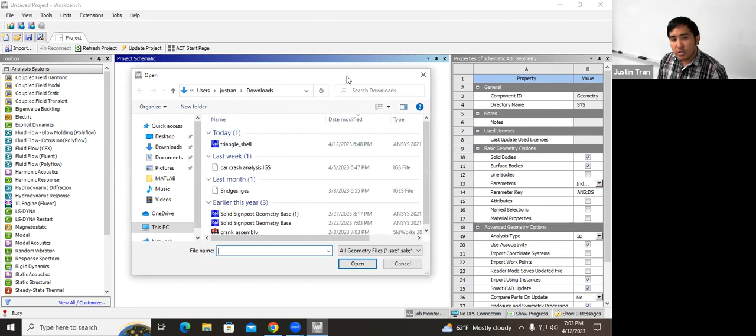And just for cost's sake, the original geometry for this activity was a normal solid type geometry. But it is very thin, so I went ahead and converted it to a shell for you just to make the simulation a little bit faster.

After you've imported the geometry, let's go ahead and open it up within Design Modeler. Right click on this geometry here, and open it up in Design Modeler. It should be the default because this part was made in Design Modeler. But in case it's not the default, make sure you click this one and not SpaceClaim and not the other one, I forget the other one already. But we're going to open it up in Design Modeler.

Okay. And so the reason we're opening this up in DesignModeler first, we're not making any changes to the geometry, so we're just leaving it as it is. But we're letting ANSYS know that ANSYS is going to have the ability to change this geometry, based on whichever parameters that we set.

Because if you remember from our discussion on Monday, whenever you're running an optimization, you have to specify what your design variables are. So you have to specify which variables you're going to allow ANSYS to change throughout the optimization process. And so for this geometry here, the variables that we're going to allow ANSYS to change are going to be the dimensions of this plate itself.

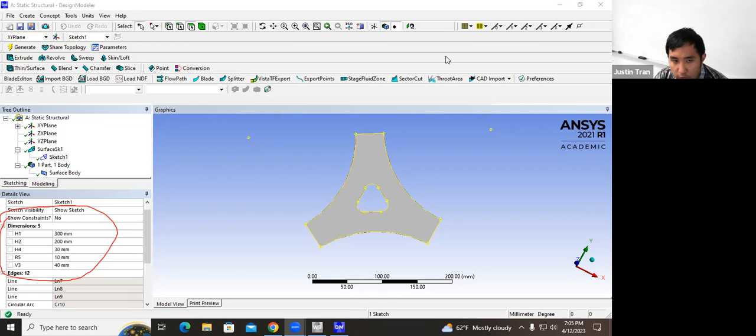And so in DesignModeler, you're going to go click on this sketch right here. You're going to expand surface sketch 1 and then click on sketch. And if you go to the bottom left of the screen, and let me make mine a little bit bigger just so you can see. If you go to the bottom left-hand side of the screen, you'll see that there are various dimensions that are being defined here. And so these dimensions here basically define the geometry of our plate.

And I'm trying to see, is there a way to kind of see where these are? And so if you click on the dimensions, you can kind of see what they are. So a lot of them define how big the part is, how big the radius of curvature is, the distance between those plates, and kind of the width of the plates as well.

And so what we need to do at this point is we need to specify which dimensions we are going to allow to change. And so later on in the activity, I'm going to have you experiment and try out different dimensions. But just so that we're all on the same page for this part, we're going to specify H4 as a parameter, as well as R5. So these two parameters right here.

And so to specify something as a design variable, if you look at each of these dimensions, there is what looks like a checkbox next to it, right? So you're going to click on that checkbox. And by doing so, you're going to put this P next to that parameter, right? So we have this P H4. And what that P basically tells you is that that is now a design variable.

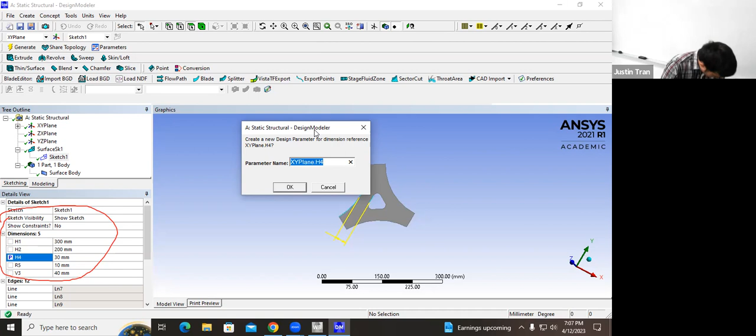And what you'll notice too is that after you click on that P, this new window here is going to pop up, asking you to define a name for that parameter. And so you can stick with the default name. That's okay. But usually when the program gives you the opportunity to name something, it's good to name it something that's going to be useful for you to remember later.

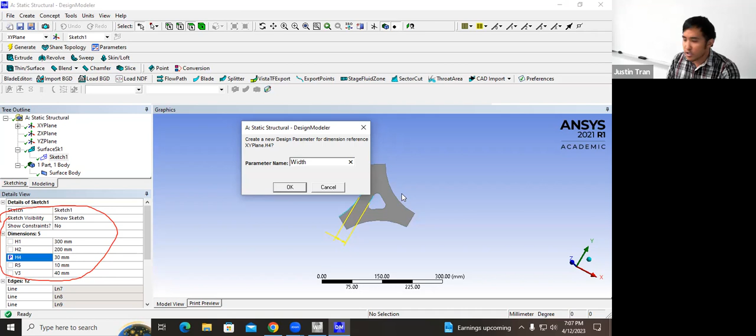And so in particular, this H4 parameter here defines how much distance there is between the edge of the plate and this inner triangle here. So I'm going to give this the name width, just so that we know later on what this parameter is referring to. And so you can go ahead and click OK.

And the other parameter that we're going to set here is this R5. So we're going to click on the checkbox next to R5, and then we're going to call this one the fillet radius, because if you look at the figure here, this R5 defines the radius of curvature for this fillet right here. And so after you've named those two parameters and set them as design variables, we're going to click OK. And then from here, we're going to move on.

Okay, and so of course, another thing that you can do is you can specify more design variables here, and that's certainly possible. But remember, if you remember from Monday, the cost of an optimization, or how many simulations that you need to run, scales very hard with the number of parameters that you put. Going from 2 to 3 is actually a very big increase in cost, and then going from 3 to 4 parameters is an even bigger increase in cost as well.

So you want to be careful with how many design variables that you put, unless you have a lot of time on your hands, or unless you have a very powerful computer. And so just so that we can finish the activity within the confines of a single lecture, we're going to stick with 2 for now. But then on your own later on, I'm going to have you try with 3 and see how many simulations that takes.

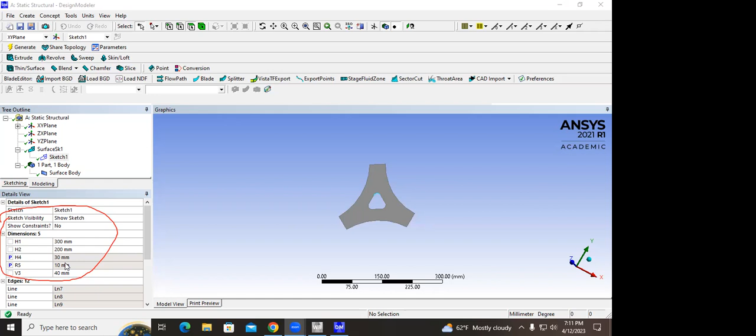So you'll see constraints later. What you'll see later on is that ANSYS is going to say, I see that you've defined these 2 parameters, and it's going to ask you, what are the constraints for these parameters? For instance, we're going to say that H4 can only be between 25 and 35. So that 25 and 35, those are the constraints for parameter H4. I see. Sounds good, sir. Yep. All right, any other questions on this part here?

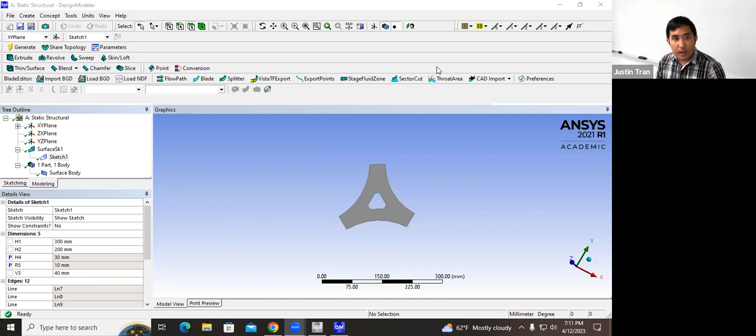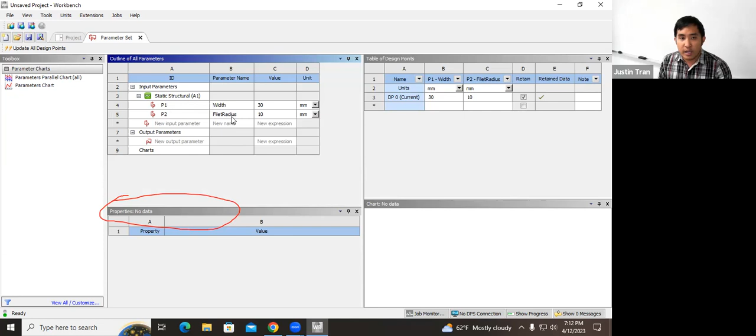Okay, so now that we've set these as parameters, we are good to go. So we can go ahead and close Design Modeler. After this, the only thing that you should have open is ANSYS Workbench. One thing that you should notice right away is that we have a new box here called parameter set. This box is keeping track of all the parameters that we've set so far. We've set 2 parameters, basically two design variables, which is the width and the fillet radius. This is where the names come up.

All right. And so the next step is to define which parts are going to make up our outputs or make up our objective function. To do that, we're going to double click on model, and we're going to open up ANSYS Mechanical. We also need to make a mesh, and we also need to define our boundary conditions as well. So we'll do that all while we're in here.

All right, so here is our plate, and it's flat, like a piece of paper. First thing I want to do here is define a mesh. We don't really need any special settings for this case, so we're just gonna set a size here. Just to be consistent with the problem document, I'm going to set a mesh size of 5 millimeters. Let's go ahead and mesh that.

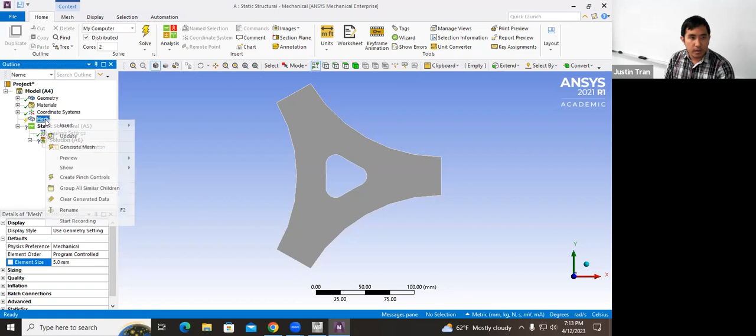And so you should see that this mesh should produce pretty well. And so this is a pretty nice mesh. Okay. And we're going to add a couple boundary conditions as well. Okay. And so first we need to add a fixed constraint, or fixed support, I should say. I should be careful with my terminology today.

Okay, so let's go ahead and add a fixed support. And we're going to apply a fixed support on this edge right here. If you're looking at the geometry, then we're going to apply the fixed support on this kind of curved edge on the left right here. The part is perfectly symmetric, so you don't really have to worry about which edge it is.

But if you want to do the same thing as me, I basically click on the Z-axis here, and so the x-axis is pointing to the right, the y-axis is pointing up, and I'm constraining the left edge of the part. Okay. Next, we're going to need to apply a force. So we're going to apply a load. And so I'm going to input a force load.

And I'm going to apply it on this edge of the part. If you're looking at it from the same direction, it's going to be the edge on the right. The only thing that you have to make sure of is that the edge should be on the opposite side of wherever you applied the fixed support. Okay, so let's go ahead and apply that edge right there. I'm going to define this.

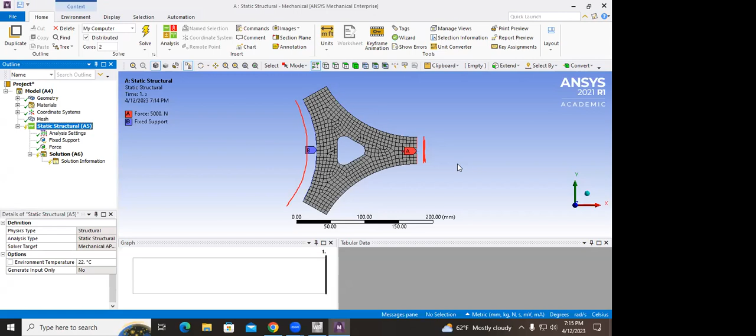Professor, quick question. Was the mesh size 5 millimeters or 5 meters? 5 millimeters. Thank you. Yeah, so a mesh of 5 millimeters, one fixed support, and one compressive force. All right, anyone have questions on this? Okay. All right, so let's go ahead and run the simulation.

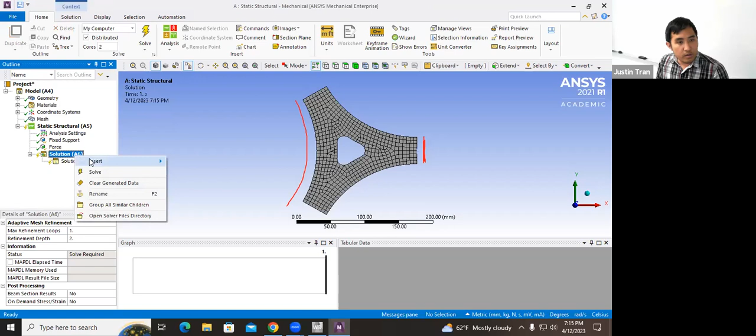And so we're going to add a total deformation field as well as an equivalent stress field. Okay. So let's go ahead and solve. Should finish up very quickly. Okay. Go ahead and erase these lines. And so you should get an equivalent stress field that looks like this, and a total deformation field that looks like that.

All right, was everyone able to get this deformation field? So you should get a max deformation of about 0.036 millimeters. And then your maximum equivalent stress should be about 95.2 megapascal. Okay. Anyone have questions on this part? Question in the chat. Okay, good. All right.

So now that we've run the simulation, we need to specify which variables are going to be the outputs of our optimization. Remember, the way that the optimization works is that ANSYS is going to tinker with the design variables. We've already set the design variables, and then it's going to run simulations and check the results in terms of whichever we define as the outputs. We basically have to tell ANSYS, what should it be looking for? What should it be optimizing over?

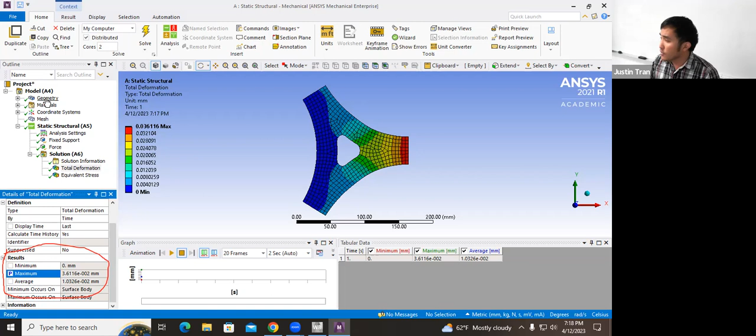And then the next thing we're going to set here is that we also want to save on cost. The way that we're going to save on cost is we're going to optimize over the mass of the geometry. We want to reduce the amount of mass as much as possible. This is a very common thing in optimization, because a lot of times you want to save material costs, you want to save manufacturing costs.

Okay. And so you're going to click on geometry over here. So click on geometry. And of course that's going to change the details window in the bottom left. Okay. You're going to click on properties.

And then the other thing that we're going to set as a parameter here is the mass. So make sure you click on that as well. So we've set two outputs here. We've set the maximum deformation as an output, and we've also set the part's mass as an output as well. Any questions on this?

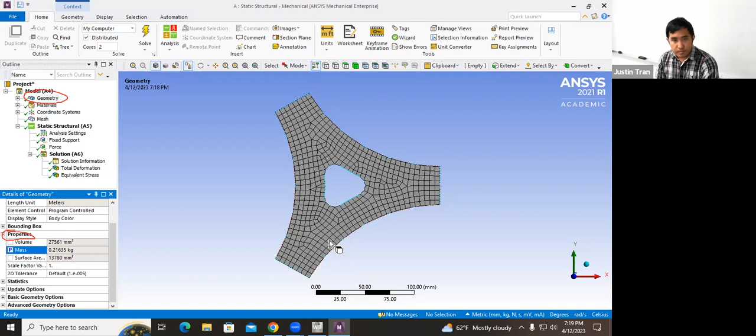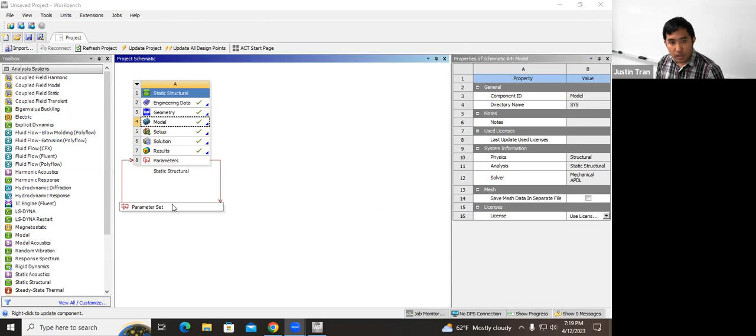Okay, so now that we have our design variables, now that we have our outputs, we can go ahead and set up the optimization. So go ahead and close Mechanical. Believe it or not, we don't need that anymore today, even though we spent most of our time there. And so now let's go back to ANSYS Workbench. Where we're going to spend the majority of our time is going to be on this box right here called parameter set.

So let's go ahead and double click on parameter set. That's going to bring up this new window, which shows you everything that we've marked as P. For the input parameters for our design variables, you can see that we have the width and the fillet radius. Those are the things we set in DesignModeler. And for the output variables, we set the total deformation maximum and the geometry mass as outputs as well.

All right. So now that we've checked the parameters here, we need to set an optimization. Let's go ahead and close this parameter set. We're back on Workbench. Now we're going to add a new object from the toolbox on the left-hand side. It's actually not going to be from our usual analysis systems, so go to the toolbox and scroll down.

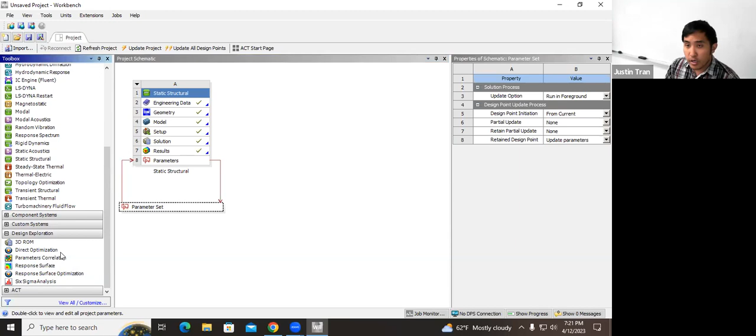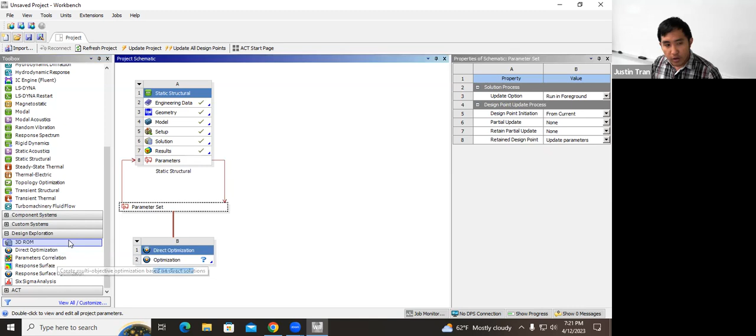Go under Design Exploration, and then we're going to use this tool called Direct Optimization. Once you've found Direct Optimization, double click it. Since we only have one parameter set here, it should directly associate with that parameter set. Make sure it's associated with that. Then once you've done that, double click on this optimization right here.

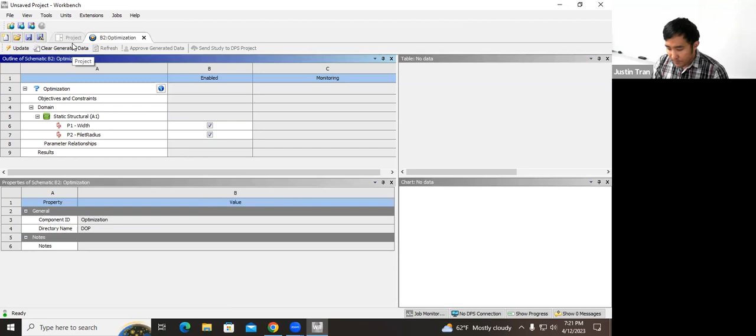So was everyone able to get to this menu by setting a direct optimization? So I kind of lied earlier. We're actually going to spend most of our time here, not inside the parameter set. First, you'll notice we have a question mark next to Optimization, which tells us we need to set something there. Left click on that once, and we are going to set some parameters in the bottom middle of the screen. There are a lot of different settings, but luckily we only have to change a couple.

The main things we're going to investigate are these two parameters: the method selection and the runtime index. Let's look at method selection first. This is your way of specifying which optimization method ANSYS is going to use. We talked about this at the end of lecture on Monday. There are different optimization methods used to run an optimization. If you wanted some control over the method, maybe the auto method is not performing well, you can make that change here.

You would change this to manual, and then change the method here. You can see there's a few different methods, one of which is dangerously named MOGA, close to something else that is not savory. But for now, we're going to keep it on auto and let ANSYS choose its own. If you did want to experiment with different methods, that's how you would do it.

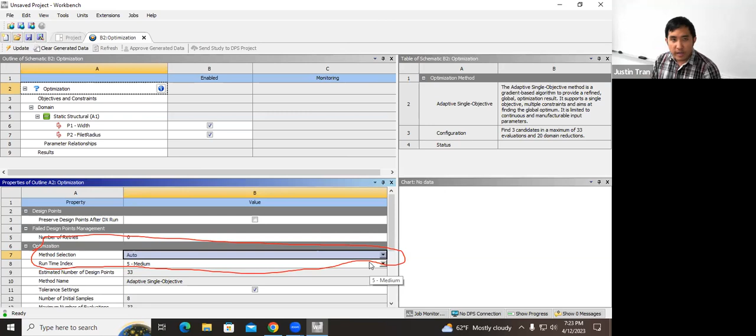But the main thing that we're going to change here is this run time index. From this run time index, you can change how quickly or how long you want to run your optimization.

And so you can see here that it gives you various scores here from 1 to 9. Okay. And so the difference here is that 1 is a very quick optimization. That's one that's going to finish very quickly, but it may not give you the most optimal solution. It's basically just going to do a quick search, and then it's going to give you the best results from that quick search. And so it may not be truly optimal.

Okay. On the other side of the spectrum is a 9. A 9 is going to be a long search, a very thorough search, and so that's going to take a very long time. But what you get from this is that, if you use a 9, you're pretty confident that the result that you get is going to be very, very optimal. And so that's if you have a lot of time on your hands and you really want to make sure you get

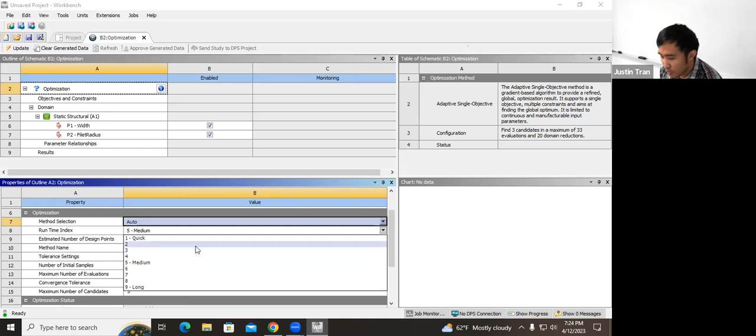the right solution. Okay. Where we're going to be for this activity, just to make sure that we finish in time before the end of class, is a 2, actually. Okay. I tried this out with various different parameters, and I waited a very long time. But the one that works best for an in-class setting is 2. Of course, with only a 2, we're not going to be very confident that the result is truly optimal. But we only have 75 minutes in a class, and so we have to go with that.

But when you're trying this on your own, definitely experiment with this and see, if you raise this up to a 3 or 4 or 5, or even a 9, how long it takes. Okay? A fun experiment would be to set it to 9 right before you go to bed, and then wake up the next day and see if it's finished or not. And believe it or not, that's not an easy question to answer. It may be done. It may only be 20% done. You don't know, and so it depends on your computer.

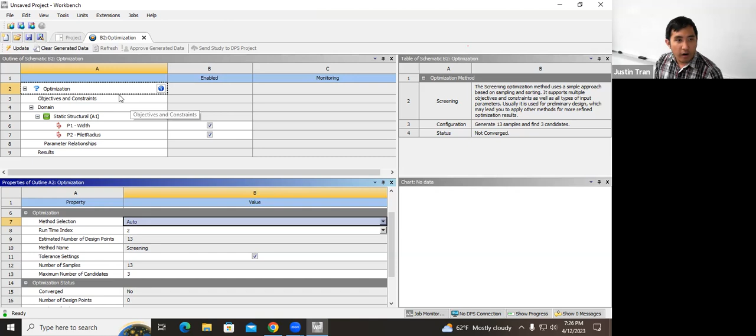Okay, but we'll go ahead and set that to 2, and then we'll go from there. Okay. All right. Any questions on this part here? Okay. And so our next destination here is going to be objectives and constraints. Let's go ahead and click on that. If you click on objectives and constraints, then you're going to see a new window pop up on the right.

Okay. And so from here, we're going to define how ANSYS should treat each of the outputs and each of the design variables of our optimization. Why does it keep doing that? Okay. If you click on this down arrow right here, under select a parameter, you should see all of the parameters that we've selected so far. First we have our input variables, the width and the fillet radius, and then we have the outputs here, total deformation maximum and the geometry mass. From here, we're basically going to tell ANSYS what it should do for each case.

Okay. So let's go with our outputs first, and start with total deformation maximum. Now we're going to tell ANSYS what it should do with this. What should it be optimizing? For this optimization, we want to minimize this as much as possible, so we want to minimize the amount of deformation that we get. You're going to select minimize under type right here. And we're not going to constrain this, so we're just going to leave it as it is.

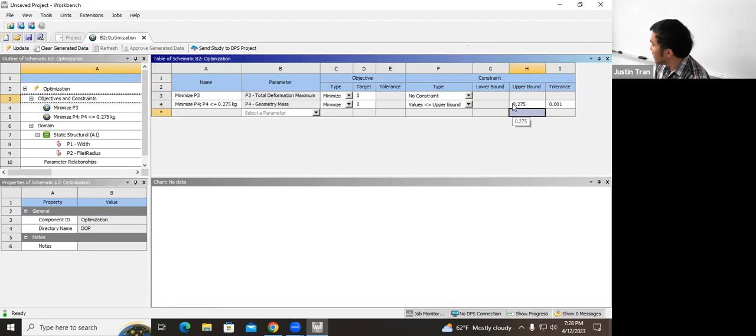All right. So basically we're telling ANSYS that no matter what you pick for the design, the mass should not exceed 0.275. Yeah, question. Dr. Tran, sorry, there's a question in the class first. I'll come back to you.

The unit, would you be able to change it easily for this? Oh, yes. So this assumes the default units for whatever you left on ANSYS Mechanical, from the model. So if you change the units there, it's going to change the units here. So you have to go back. Yeah, that's usually the best way to do this. All right, Ivan, question?

Where did you get that value from? That 0.275? Nothing special. This is just an activity, and so it was something that gives us interesting results for this optimization. But this part also doesn't really have any physical significance. So where would an engineer? Does the engineer just set that to some low number, or?

Yeah, so normally, if you're running this optimization in practice, you would get that number based on the design constraints that you're given for the part. Maybe you're designing a part that's going to be mass produced, and your boss is telling you that you have to produce this part with less than $5 or something like that. So based on the cost of materials, the manufacturing costs, all those things, you could compute the maximum amount of mass that you can have for this part and still satisfy that cost constraint. I see. Thank you, sir. Yeah.

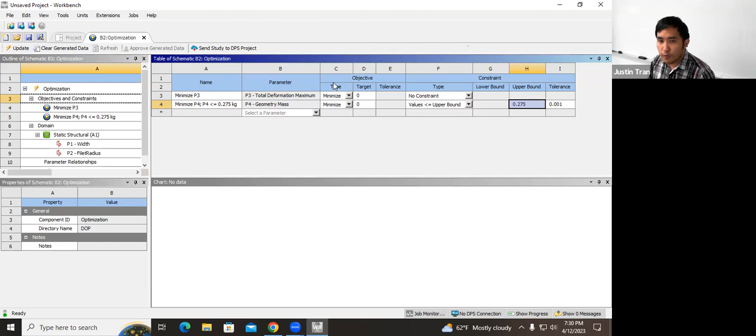All right, any other questions on this part here? Okay. So those are the outputs, and now ANSYS knows what to do for those. It wants to minimize these with an upper bound for the mass. Now let's work on our input parameters. We have the width and we have our fillet radius. And for these ones, we're actually not gonna put any objectives here. Instead, we're going to put the objective somewhere else.

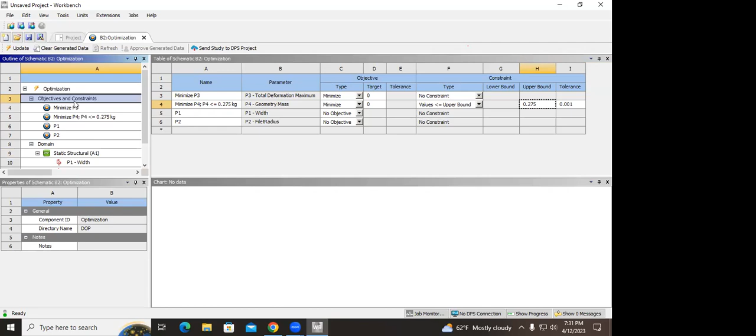Professor, real quick, P1 was the width, right? I left it a default name, that's why. Yeah, P1 is the width, and P2 is the fillet radius. Thank you. Okay. Next thing we're going to do is we need to constrain our input parameters. To do that, we're going to click on static structural A1 on the left right here. Once you click that, it'll show you your two input parameters here.

And here we're looking at our constraints. For the width, we have a lower bound of 27 and an upper bound of 33. And for the fillet radius, we have a lower bound of 9 and an upper bound of 11. So these are the default constraints. The way ANSYS selected these is that it just chose plus or minus 10% over the default values. For the width, our default value is 30, and for the fillet radius, our default value is 10.

But for this optimization, we're going to increase the bounds. For the lower bound for the width, we're going to set this equal to 25. And for the upper bound for the width, we're going to set this equal to 35. For the fillet radius, the lower bound we're going to set equal to 8, and the upper bound equal to 12.

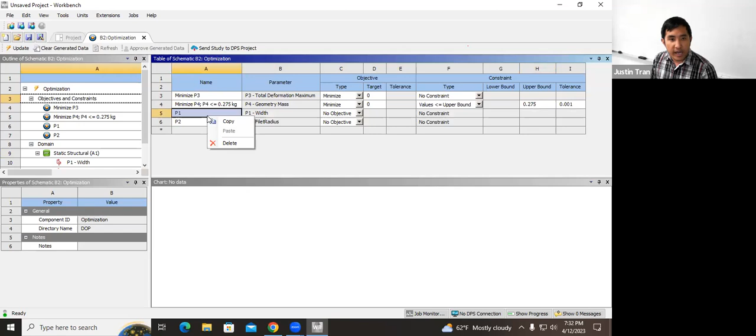Okay. And so now we're basically telling ANSYS to expand your search, so search over more parameters, because we've relaxed the constraints. And actually, let me go ahead and delete these P1, P2, just so that it doesn't get confused. So under objectives and constraints, if you added the P1, P2 here, just go ahead and delete them. I was kind of skipping ahead in the notes a little bit.

Actually, we set the constraints here. So there's no need to set the constraints under objectives and constraints, because these are purely just for the objectives. And then for the design parameters, we set them here under static structural. Okay. And so in the end, you should have a left-hand side tree that looks like this. So under objectives and constraints, you should have two entries.

And so you should have minimize P3, minimize P4, with P4 being less than or equal to 0.275. And then under static structural, you should have a lower bound of 25 and an upper bound of 35 for the width. And then the fillet radius should go between 8 and 12. Okay. Any questions on this here? Okay.

Okay, so let's go ahead and clear this. And so we're just about ready to run the optimization. So let's go ahead and click back here. I'm going to click on optimization again, and I'm going to increase the width of this table just so it's not as annoying to read. Okay. And so I clicked on optimization. You can see now that it has a yellow lightning bolt, and so that tells us that it's ready to go.

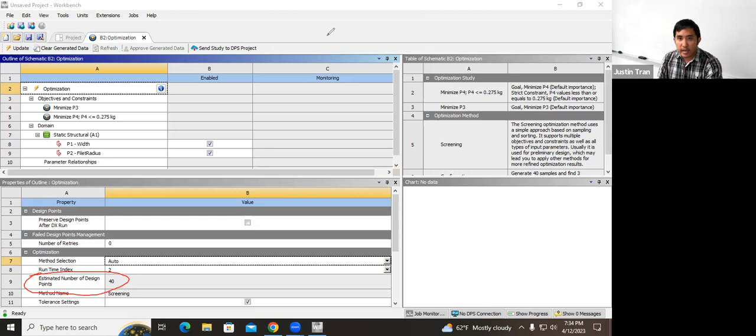But before we start, I want you to take notice of this line right here, line 9. This line 9 tells you approximately how many simulations ANSYS thinks it needs to run in order to complete this optimization. And so under the current settings, the current constraints, and the current runtime index, ANSYS thinks it's going to take 40 simulations.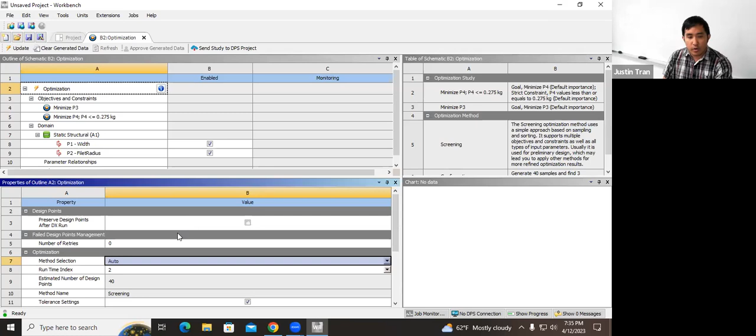So let's change this runtime index and see how the simulations are going to change. If we change this runtime index to 3, it's going to take 59 simulations. If we change it up to 7, it's going to be 136. And then the worst case is going to be 192 simulations, but that's going to take a very long time. So let's go ahead and change it back to 2 and run the optimization.

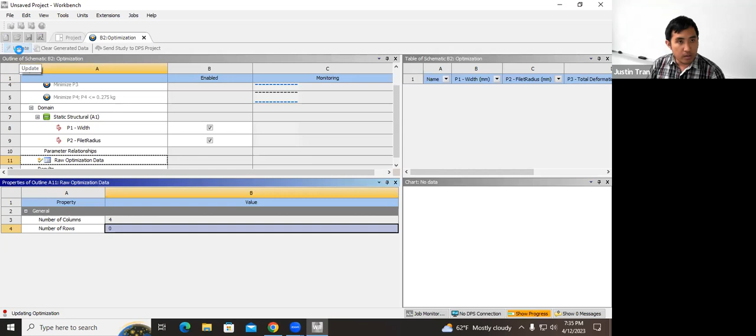Okay, so once you're ready, you're going to go to the upper left-hand side of the screen and click Update. This is going to start the optimization process. So let's go ahead and click that. Okay, and so now the optimization is going to start running. And so now we sit and we wait, and we're going to wait for a very long time.

But if you want to check and see how the optimization is going, you can check on this table in the top right here. I know the activity is a little bit annoying here; you have to click and drag these windows around a lot. But this table is showing you all the different design points that the optimization is trying. If you scroll down this table, you can see here we have 40 points, and each row here is a different simulation. And so you can see your simulation completing in real time.

Can I ask a question, Dr. Tran? Oh, sure. Yes. Sorry. Is there a relationship between the number of simulations and accuracy? The more simulations, the more accurate, or is it just that more simulations means it's complicated for the computer? Yeah, we discussed that before. The number of simulations is based on the runtime index, and the more simulations you run, you're going to get a more optimal result. Okay, sounds good.

This is not the best analogy, but you can almost think of it like throwing darts at a board. If you have 40 darts and you're being asked to hit the bullseye within 40 darts, you might hit it, but if you had 200 darts, you're going to be much more likely to hit the center because you have more tries going at it. I see. Sounds good, sir.

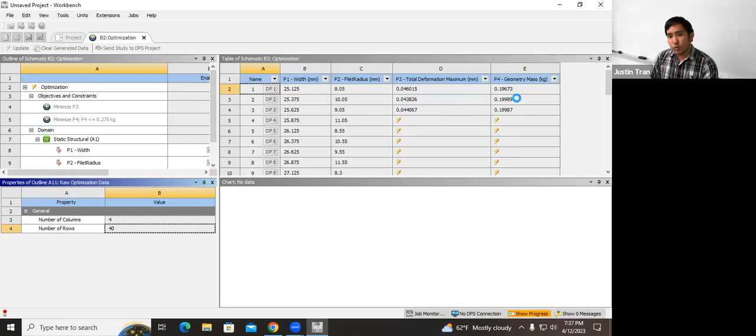So each row here is a separate simulation. So the first simulation we're using a width of 25.125 and a fillet radius of 8.05, and these are the results. Okay. And so we get a total deformation of 0.046 and a mass of 0.196.

And then what it's doing from here is that, for all the different parameter sets, it's changing the geometry, it's remeshing it, it's reapplying the boundary conditions and running the simulations and tracking what you get for the results. Okay. And so from here, unfortunately, there's not much we can talk about except for it to wait. And so, at this point, if anyone's having some issues getting to this point, I'll go ahead and come around and answer questions, or we can just kind of hang out until then.

I have a question, Professor. Sure, go ahead, Chris. So under objectives and constraints, P1 and P2, I kind of got distracted. I didn't see what you did with those two. Yeah, so I kind of made a mistake. So I thought that we would place the constraints on P1, P2 under objectives and constraints, but we actually put them later. So you can go ahead and delete them.

I think if you leave them there with no constraints or no objective, it shouldn't change anything either. But just for cleanliness, I just kind of deleted them from objectives and constraints. And I set those constraints under static structural A1. Okay. Yeah. All right, Bob, questions?

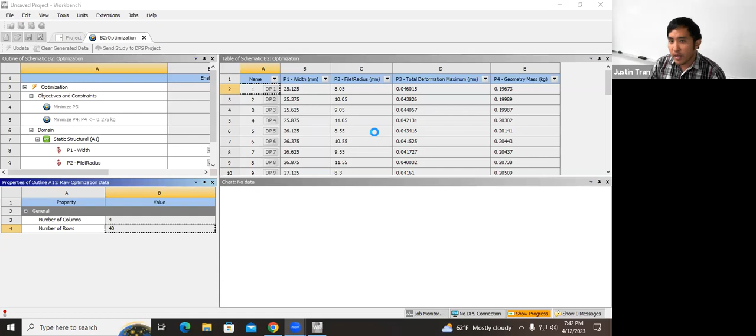I probably will, just because I know that time is going to be crunch time for the final project. I know you guys have other classes too. Or you could also make it extra credit, and some of us will still do it. Yeah, I'll probably make it extra credit. Assignment 8 is very short though. It's not very long at all. And so I'll probably make it extra credit, like maybe 20 homework points or something. Sounds good, sir. Thank you. I think that's all the questions I had for the class.

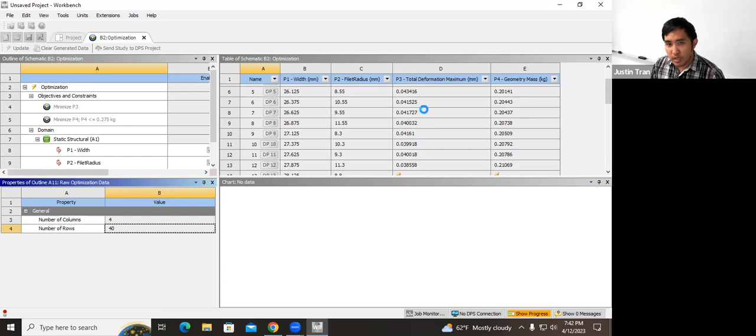Yep. A question: got an error in row 5. Yeah, so actually that's a good question. So there's a question in the chat that says you may get an error on some simulations here. That's okay. That can happen sometimes when the computer is randomly changing the parameters. You may get a situation where either the mesh fails to form, or the simulation kind of blows up, or you might get a pivot warning or something like that.

That's kind of the risk that you run when you're doing such a wide search like this. That's okay. If it's only a couple times, that's fine. What's going to happen is that ANSYS is just going to ignore those simulations. If it's happening a lot, then yes, that's a cause for concern. But if it's just 1 or 2, that's okay.

Professor, I have a quick question. Sure. What's up? I don't think it's within the scope of the class. However, in terms of variation, what if you're trying to optimize a part, but the overall shape should remain the same? Like in terms of topology, whether it's mass reduction. Oh, it's a good question. So you're asking how do you set up that kind of optimization? Yes. Okay. Yeah, so it's challenging.

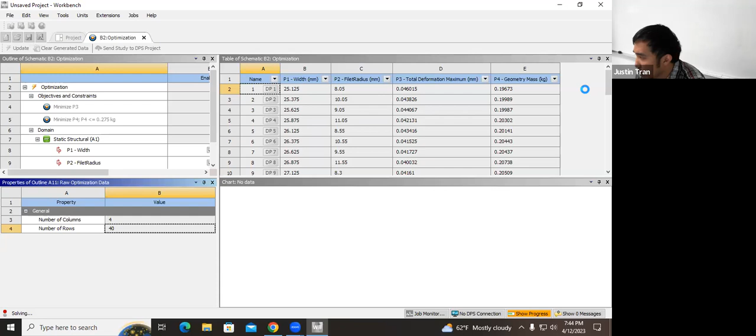A lot of times, a lot of the constraints that you have and the things that you want to achieve are more higher level than just minimizing the mass, or minimizing the total deformation, or putting constraints on these dimensions, right? Let me see if I can still do it while the optimization is running. Another way to make sure that your overall shape stays the same is that you could specify relationships between parameters as well.

Right now, ANSYS is basically randomly choosing values for these two parameters completely unrelated to each other, so the shape of the part is going to be somewhat random. But if you want to preserve the shape, certain parameters have to be related. If you cut down this parameter by maybe 20%, then the other parameter also has to be cut down by 20%. You can specify those relationships here in the optimization.

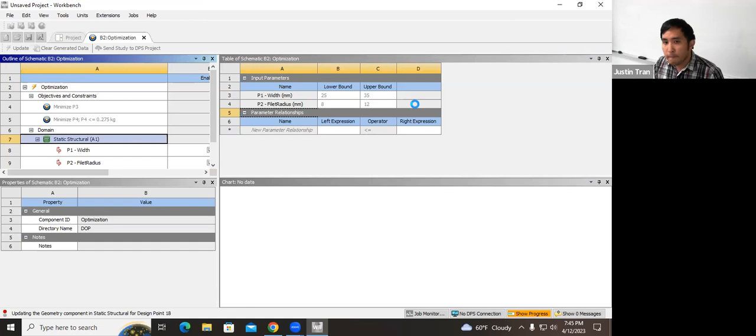For a more practical case, it's going to be more complicated than just setting one or two relationships. Oftentimes you have to set a lot, but that's basically how you do it. Thank you. Does that answer your question, Amit? Yes, sir. Okay, good.

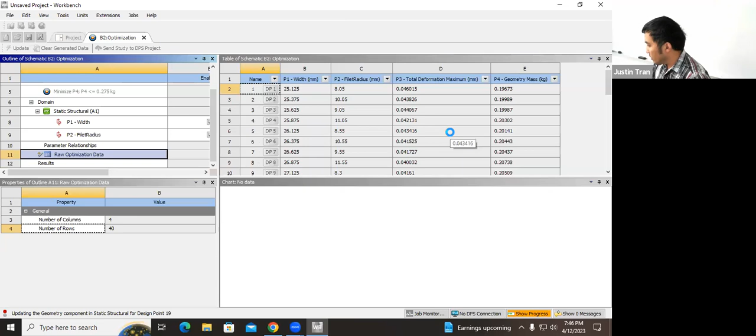Let's see, 19. Actually, it's going pretty fast, so we'll be done before 8 o'clock for sure. All these staples. Every day I come here, there's more random staples just lying around.

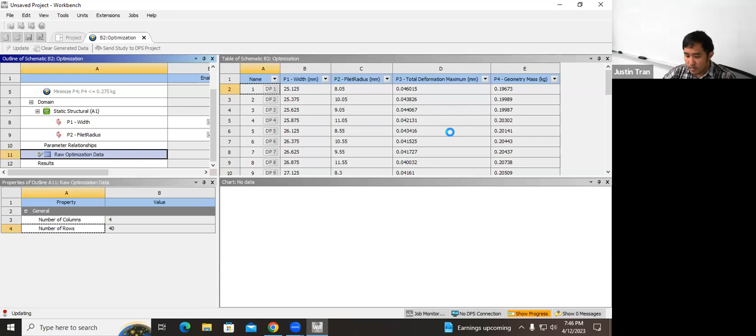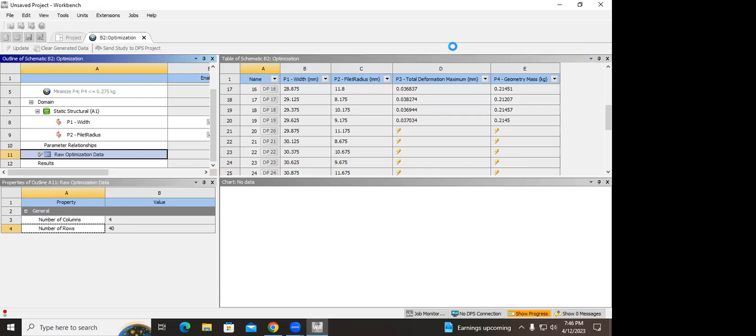Dr. Tran, I have a question regarding this. Sure. Is it possible for the software to get stuck in a loop? And how would the user know? Say we're waiting right now, and what if it's in a loop and we just don't know it? Worst case scenario, I'm not doubting your work. I'm just wondering how a user would know if it's in a loop, and how would they go about it?

Yeah, it's a good question. You can monitor the optimization in real time, and that's what I'm looking at right now. Oh, I see. One thing you can check is to make sure that this table is being continually updated. If it's still finishing simulations, it'll still be churning. So if you ever reach a point where you waited a while, it just stays stuck for like an hour.

If it gets stuck on a particular simulation and it's not finishing, maybe it's having trouble with the mesh. Because remember, essentially what you're doing here is changing the geometry and applying the same mesh settings to every geometry. I see.

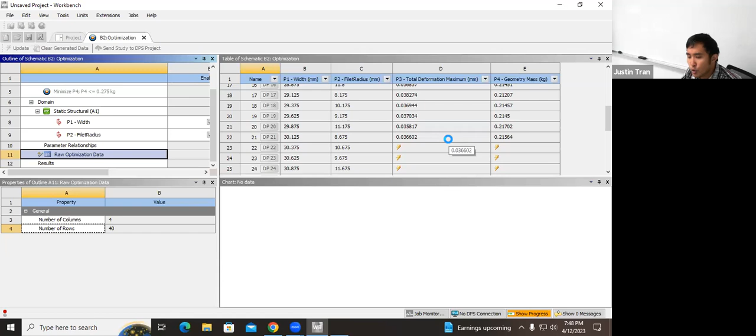But that might be dangerous, because if you make a change to the geometry such that you create a very sharp corner or sharp edge, and the mesher has a really hard time meshing that kind of area, you may end up with a situation where your mesh just totally blows up, right? And so your number of elements...

Now I have two more questions. Sure. How do I word this without sounding not intelligent? Would the engineer be able to modify the simulation while it's running at the same time? No? It's going to corrupt the simulation because it's being edited. Right. Because it's all automated, it's already taken all the settings and applied them to all of these. So we cannot do any more edits while it's doing the actual simulation.

Right, I see. And there's a reason for that too, because you also don't want to change any simulation settings midway through, because then it's going to kind of invalidate everything you did before that. Let's say that you change the mesh. Now you have half your results that are on one mesh setting and the other ones on the other mesh setting, and you can't really compare those apples to apples. You know what I mean?

I see. So having said all that, when an engineer runs FEA, do they usually have to be on standby next to the computer, making sure the simulation is okay, or is it common for engineers to just run a simulation and check back the next day to see how everything went? No, definitely not. I mean, of course, it depends on how long it takes. Something like this, which is probably going to take us about 20 minutes, is usually okay just to kind of stand by and maybe answer emails while you're waiting.

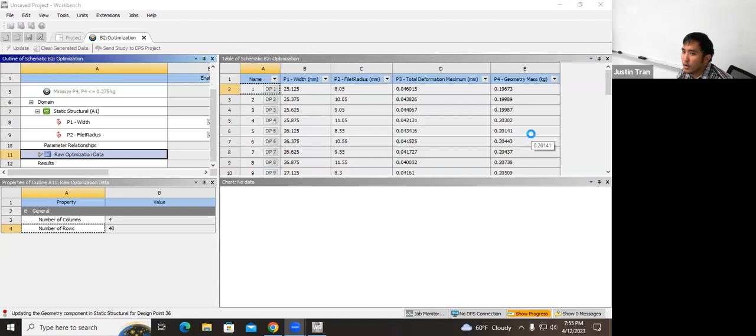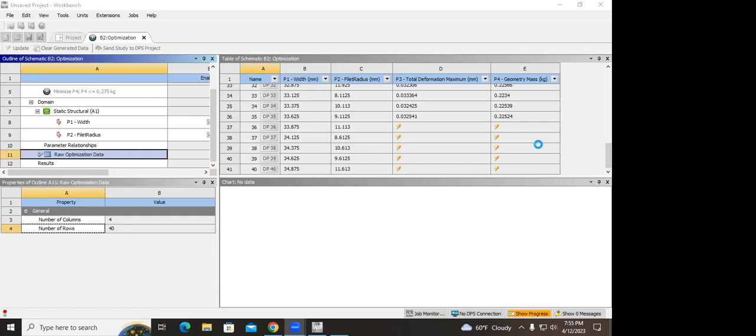Which FEA software uses Fortran? It was our own homebrew software, so it was one that I developed. I see. And what university was this at? This was at Stanford. Oh, very nice. Yeah, I was just wondering. Sounds good, sir.

Let's see how we're doing. Almost there, 3 more simulations. Oh, question in the chat. Let's see, 4 errors. Yeah, four errors is fine. Don't worry about 4 errors.

What games am I playing now on my PC? I've actually been playing my Switch recently. I got the new Fire Emblem game, Fire Emblem Engage, so I've been playing that one a lot. Not much I'm playing on PC right now.

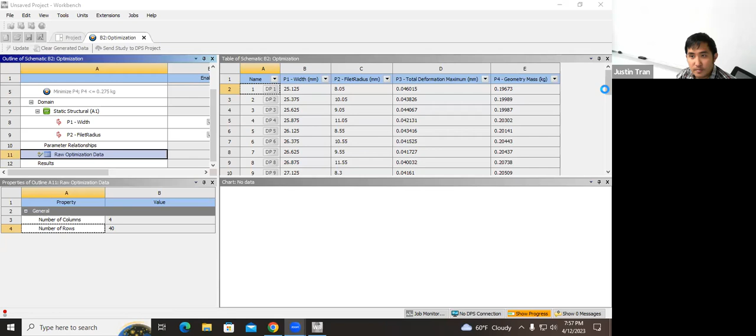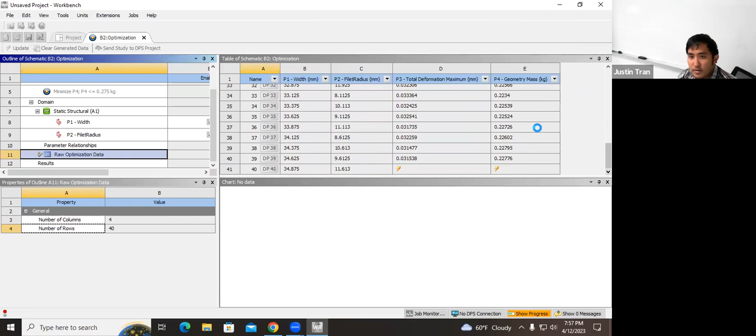Dr. Tran, during my undergrad, my undergrad's in structural engineering, so we had to do FEA. Not civil engineering, structural engineering. There's a difference, I'm just putting that out there, because everyone thinks structural engineering falls within civil engineering. But I digress. During my undergrad, the university I was at was using Abaqus.

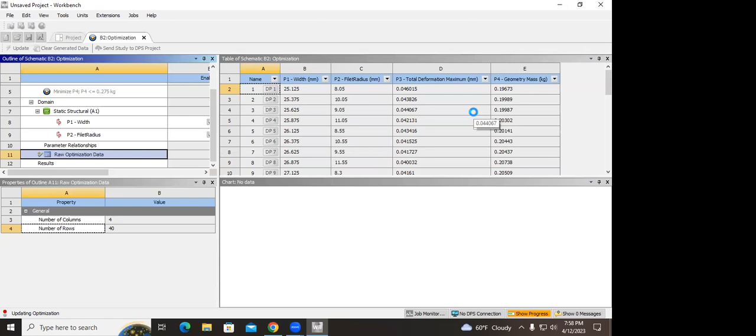What's your opinion on Abaqus, and why don't we use it here at CSUF? From my understanding, Abaqus is more research oriented, and ANSYS is more industry oriented. Is that why? Yeah, that's right. That's more just based on the audiences that typically use them. Abaqus is used more in research labs, and ANSYS is more used in industry. I like Abaqus. I've only used it a few times, but I know it's well respected and gives you good stuff.

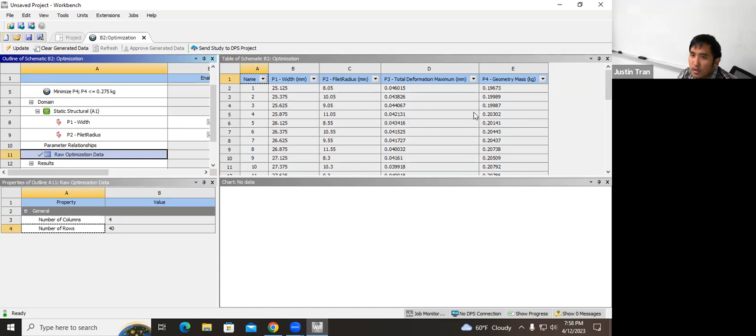The reason I use ANSYS here is because when I started working here, there was already a relationship between the ANSYS company and Cal State Fullerton, and there wasn't such a relationship with Abaqus. Yeah, when I first started with Abaqus, it was very difficult because there aren't as many resources online as there are with ANSYS for a student. So it was very frustrating, but thank you for your Abaqus input.

The way I understand it, a lot of the research labs that use Abaqus have their own internal documentation about how they use it, and of course that doesn't really get shared around much. ANSYS, the company, has done a much better job of educating its user base. Yeah, it's a lot more user friendly. I agree. I remember installing Abaqus was very difficult. That was an activity on its own.

Another faculty here tried to get an Abaqus license for our school, but it didn't go anywhere because the school didn't want to pay for it and Abaqus wasn't willing to give us a discount. So ANSYS was the least activation energy required to get started. Interestingly, before I started working here I'd never used ANSYS, so I learned it on the fly while teaching the course, which was a very interesting experience.

What software did you use then? Were you using Abaqus? Which software were you using before you came here? Oh, it was our homebrew software, one that we developed in the lab. You mentioned that. Yeah. I see.

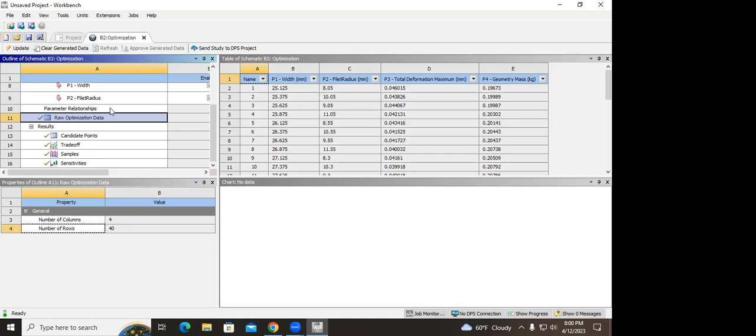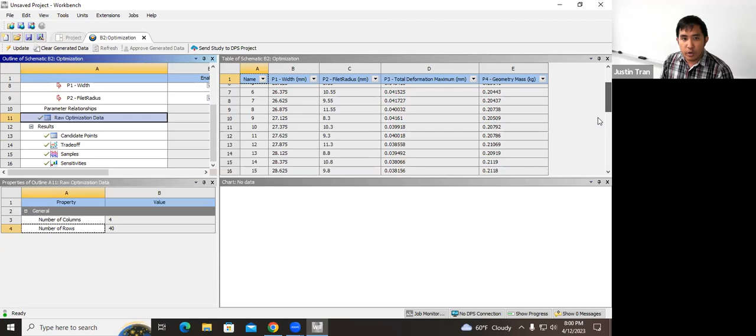Okay, all right. My optimization is done. Yours might still be going depending on how strong your computer is. For the last 15 minutes today, I want to show you how to look at the results. These are the 40 points that we simulated, and ANSYS automatically selects the 3 best results. If you click on candidate points right here, it's going to show you the 3 best results.

And so the best result here had a width of 28.875. It had a fillet radius of almost 12. And it had these deformations here and this mass. And so remember, we're trying to optimize 2 things at the same time. And so even though these 3 points are different, they're going to give you 3 different results in terms of the total deformation and the mass.

And so maybe one result might be better for the deformation. In this case, candidate point 1 gave us the best deformation. The other 2 points gave us a larger deformation, but the other 2 points are slightly better for the mass right here. Sometimes you'll get a result with a clear-cut winner. Here it wasn't that complicated; it's just we chose 2 outputs that were kind of conflicting with each other. And so you're going to get kind of a gray area solution, and you can choose which one you like the best.

ANSYS has chosen this one as the best one because this one had the best deformation value. But maybe if you really want to optimize over the mass, maybe you'll click candidate point 2. That's what you would pick. Okay. And so you can go ahead and experiment with this. One thing you can do is insert this as a candidate point. Another thing you can do is run your simulation with these parameter values just to make sure that you get these same results.

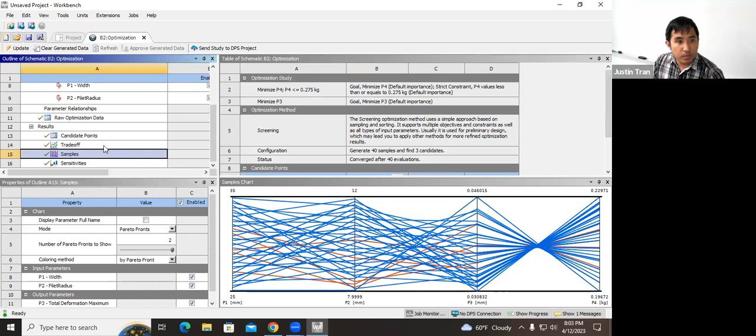Okay, so let's try that. Let's go ahead and right click this and insert it as a design point. And so if you go back here, let's see, how do we do this again? Samples, trade-off. There is a way that you can automatically load this into ANSYS Workbench and then try a simulation with it. My own documentation was not very good with this. Parameter set. Okay, here we go.

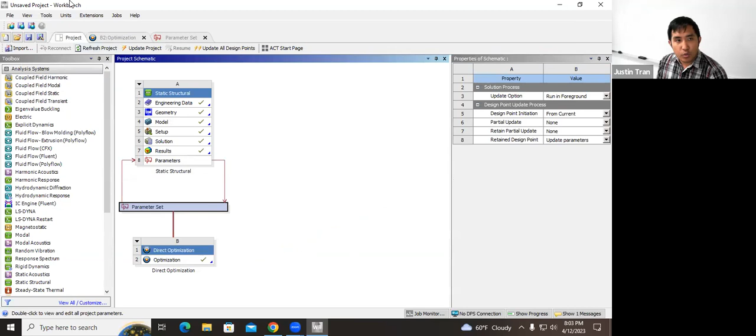Okay, so remember what I did was I looked at our candidate points here. I right clicked on candidate point 1 and I inserted it as a design point. And if you go back to the project schematic and you double click on parameter set, on the right you should see that there is one design point right here, okay? And that was our most optimal design. So what you can do is right click this and copy the inputs to current.

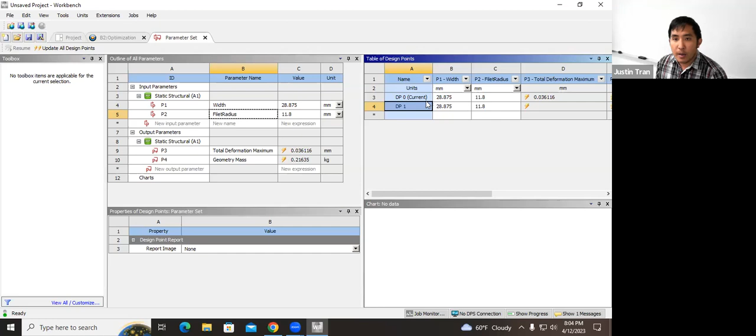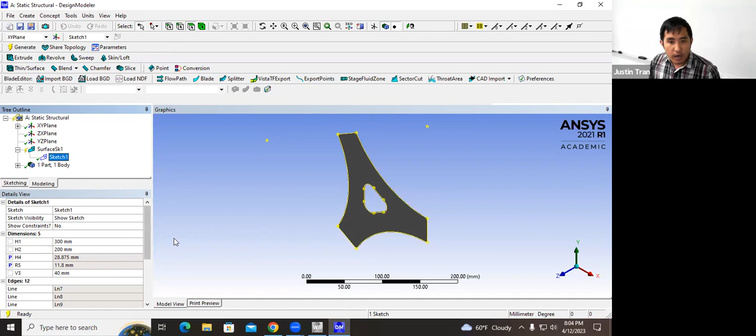And what that's going to do is change your geometry so that it matches those design points. And so now if you go back into geometry here, you'll see that the values for those dimensions should update to whatever you set your design to. If we go to the sketch right here, you can see that our values for H4 and R5 have changed to what our design point was, which was 28.875 for the width, and then 11.8 for the fillet radius.

And again, probably for you guys, because the points were chosen somewhat randomly, you may get different results than these, and that's okay. You may get a different optimal point, but this is how you would try it. What you would do is click generate, and that would change the geometry. And then you would go back into model right here, and you would rerun the simulation to show you the results. Okay. Let's go and click solve.

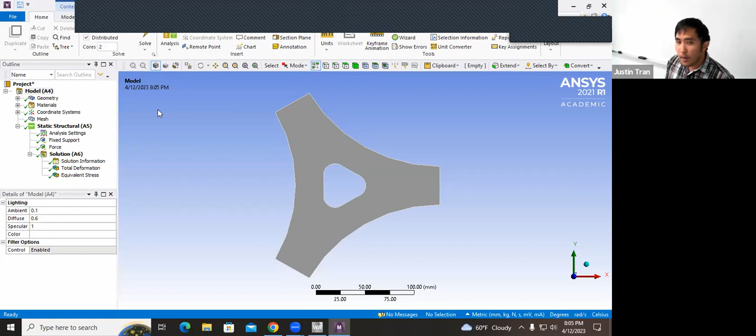And so now our geometry is updated. It doesn't look like it just because we've only been making small changes to the geometry, but this is with the updated dimensions. If you look at the total deformation, we can see that the maximum total deformation is only 0.368, which is what it was from the optimization. And if you look at the mass, the mass is 0.21451. So if you wanted to try out your optimal parameters and check other simulation results like the equivalent stress, that's basically how you would do it.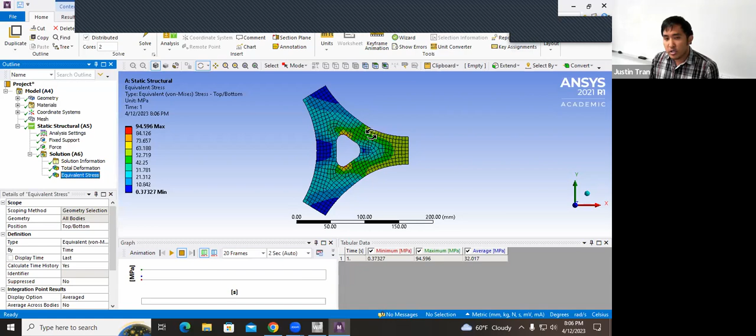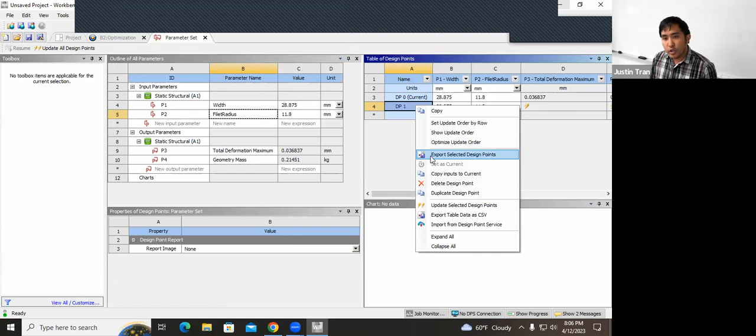So just to recap, you would go to the optimization here, go to your candidate points, right click on the candidate point that you want to test out, and click on insert as design point. That's going to insert this design point onto your table of design points once you double click on parameter set here. And then you would copy the inputs to current, regenerate the geometry, rerun the simulations, and then you can check basically everything else.

Okay, so I think I have you doing that as part of the other parts of the activity, so that's definitely useful. Okay. Any questions on that part there?

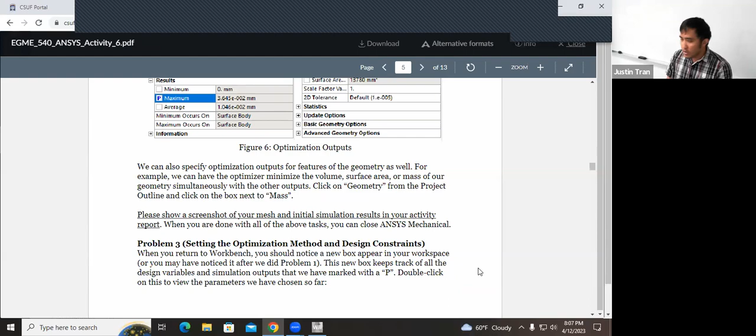Okay. All right, so for the last 10 minutes of class today, let's go over the last parts of the activity. So I'm having you do a few more things just to test things out. But that's basically how you run a simulation from front to back. So that gets you through problem 4 on the homework. Okay. But there are 3 more big problems that I want you to do.

Okay. So problem 5, I want you to change the outputs. So I want you to rerun the optimization, but I want you to change at least one of the outputs for the optimization. Okay? And so for the initial optimization, we had 2 outputs. We had the geometry's mass as well as the maximum total deformation. And so you can change the total deformation to stress.

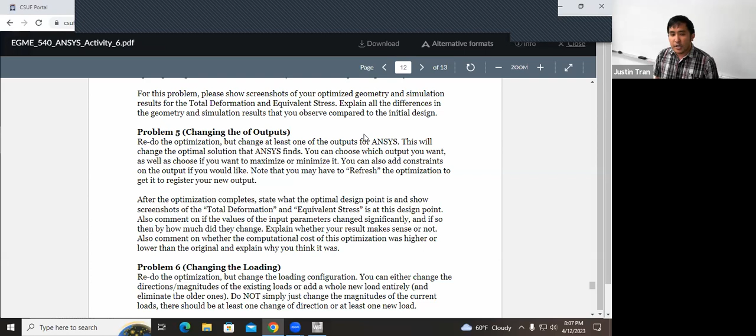You can just even add the stress to the optimization, or maybe you can do something else. And so maybe you can do like the strain or something like that, or maybe something like a directional stress, like a normal stress. Okay? And so I want you to basically change the outputs, rerun the optimization, and then show me what you get for the results. Okay.

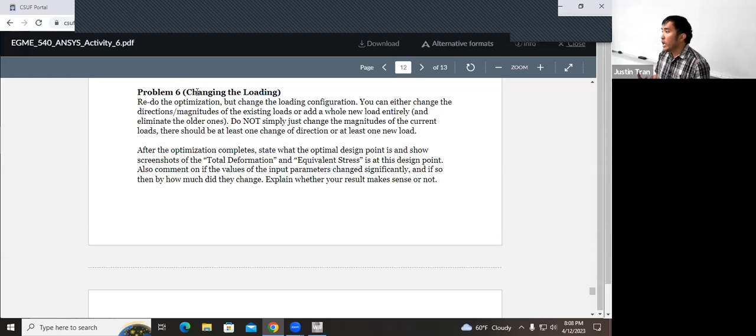Okay, problem 6, I want you to try changing the loading. And so I want you to rerun the optimization, but change the loading configuration. Okay? And so the loading for this one that we chose was fairly simple. And so we had just a single fixed support and a single compressive force. Right? And so I want you to change that. And so maybe instead of compressive force, maybe you put a shearing force.

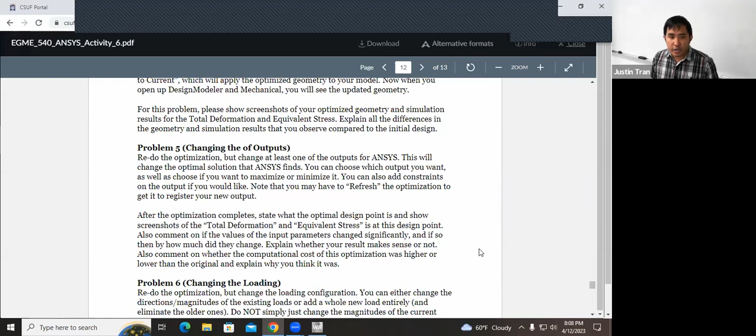Okay. You can try a tensile force, but I don't think you're going to see much differences with a tensile force. Or maybe you're going to put an internal force on this internal triangle right here. Okay. Or maybe you put a force kind of on these curved edges. You can be creative. And so I want you to change the loading. And then I want you to rerun the optimization and again, kind of show me what you get. Okay, so it's going to change your results because your results are dependent on the loading.

Okay, and then for problem 7, this one's going to take you a while because this one I want you to increase the amount of input parameters. Okay. And so I want you to rerun the optimization, but I want you to choose one additional input parameter. Okay. So you're going to open up Design Modeler. You're going to choose one additional dimension that's there. So there are 5 total that's given to you in that Design Modeler.

So choose one more, rerun the optimization with 3 design inputs, and then show me what you get. Okay? So of course, because we're increasing the amount of inputs, this is going to increase the cost of your optimization. So make sure you set aside enough time for doing this. Okay, and then finally, problem 8 is just summarizing your findings. So just like usual. Okay.

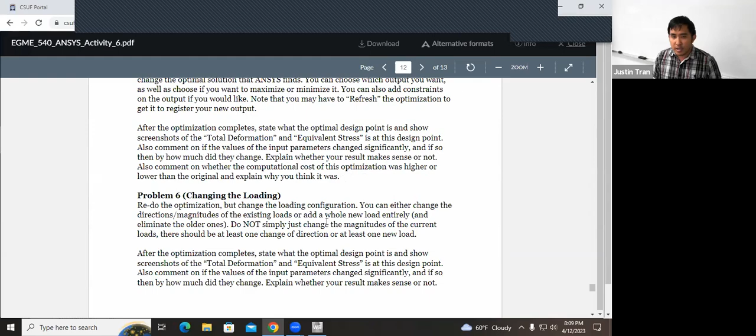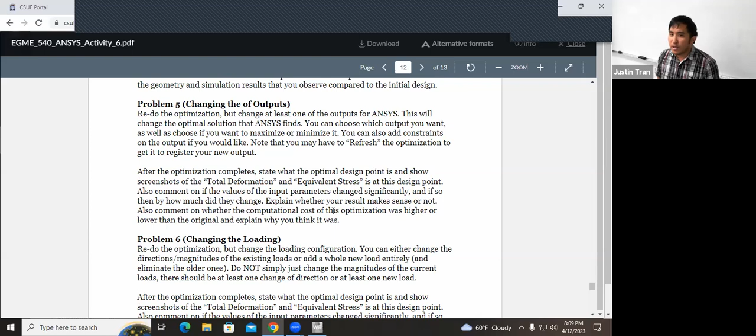Okay, so there's quite a lot to do. It is going to take a lot of time, but a lot of the time is going to be hands off. And so basically I'm having you set up 3 different optimizations. And I want you to let them go. But remember, you don't have to babysit it. You don't have to be there to watch the optimization. You can just set it and leave. Okay. All right. Any final questions on the activity before we wrap it up for today?

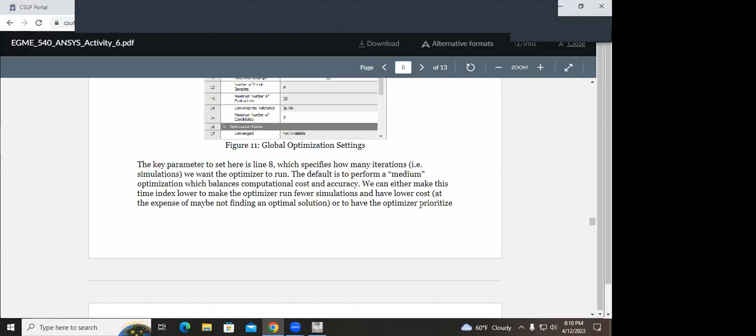Thank you, Dr. Tron. Thanks, Ivan. Have a good weekend. You too, sir. Thank you, Professor. Thanks, Ismail. Have a good weekend. You too.